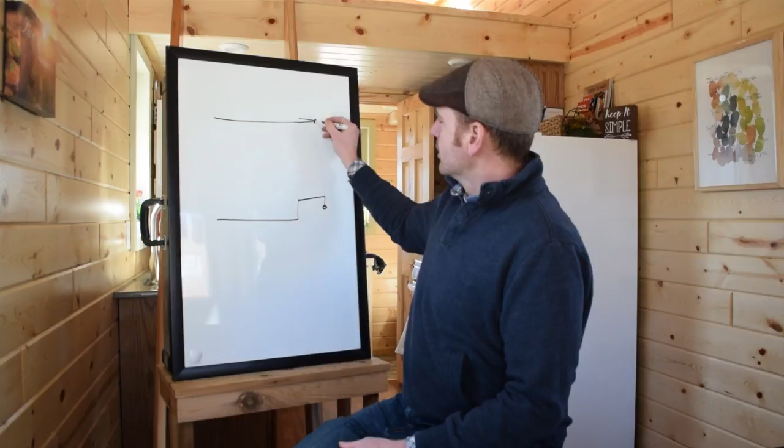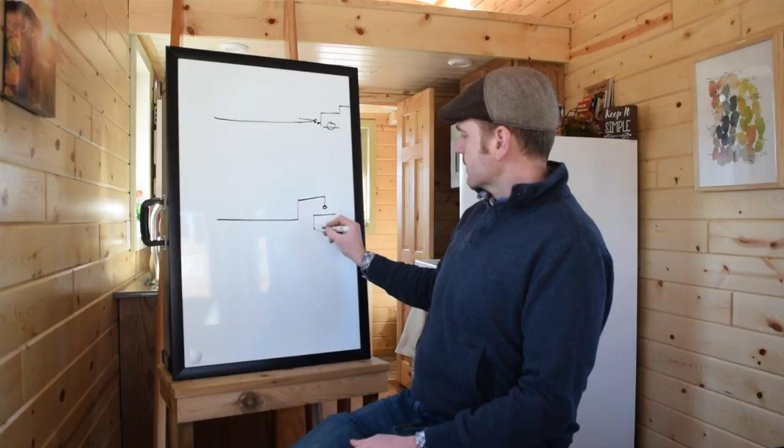This is a bumper pull. This would hook to the bumper of the truck or vehicle, let's say like this, so way out here. And then your fifth wheel style or gooseneck would go above that wheel, so then your truck would be like this, something like that, right? So then that would attach.

And this can haul more weight because the weight distribution is above that axle, or maybe sometimes it's in front of it, but it's usually distributed right over that axle, where this is way on the back of the truck, so that it gets really heavy on the back of that truck, way beyond the axles, way back here.

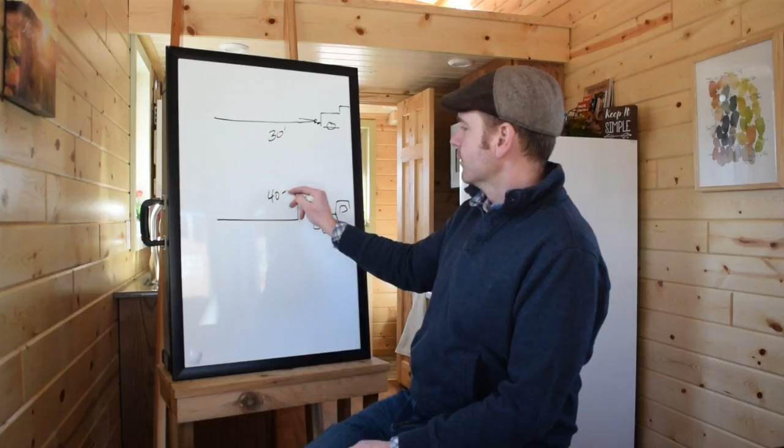So we usually go up to about 30 feet with a bumper pull style, and this you can go 40, 44 feet, something like that with a fifth wheel, maybe longer depending on some circumstances. And then within these styles you have a car hauler style, or like a deck over. So like a low boy, this is where you get your fenders in here, so your wheels would split and they would go up on top there.

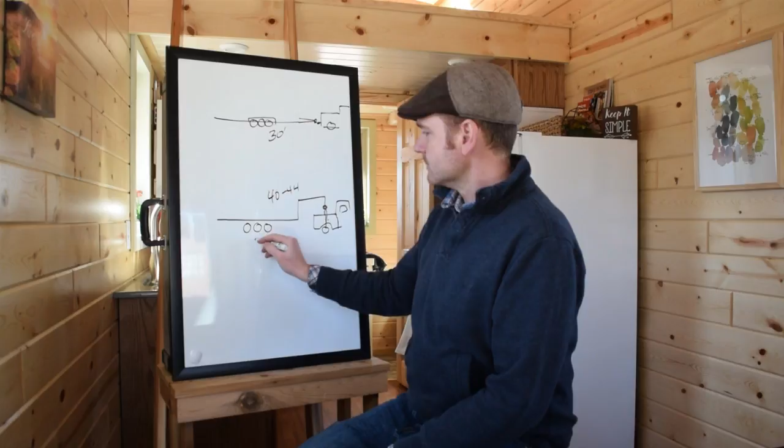Or a deck over. A lot of goosenecks or fifth wheel styles are deck overs where the tires are actually all the way under. So there's not really any wheel wells to deal with on the inside, and people actually like that style a little bit more because they don't have these fenders. Because when you build this up on these fenders, you got your house here. Let's say it's like this, something like that, real quick.

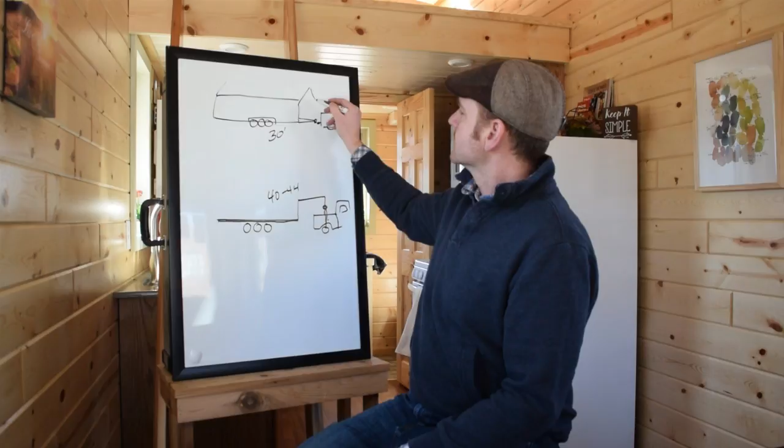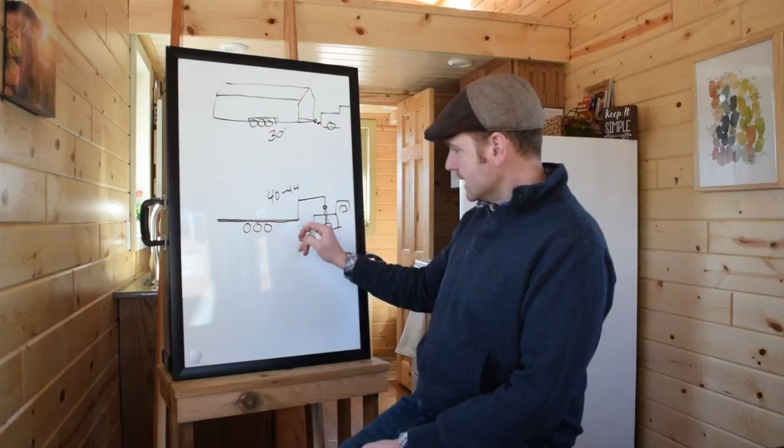This fender ends up to be on the interior wall space. You have to frame around that, and it's kind of a nuisance. A lot of times people will hide it underneath the couch or the staircase, or they'll build something in over the top of it, so you don't really notice it very much. Deck overs are great because you have a flat surface on the entire thing, so that whole surface is all flat and you can build right on it.

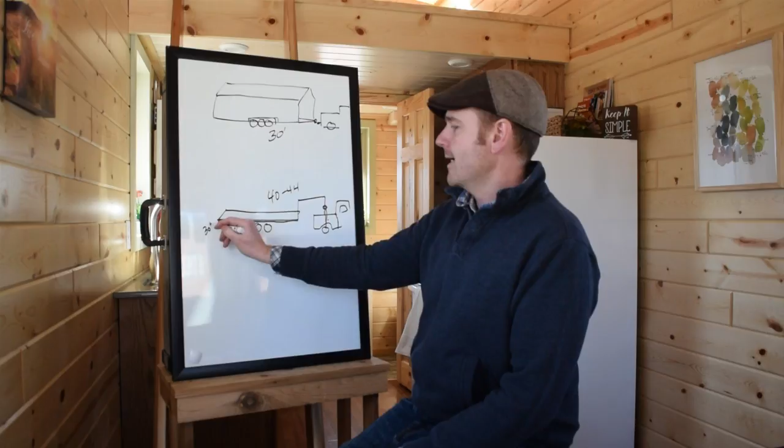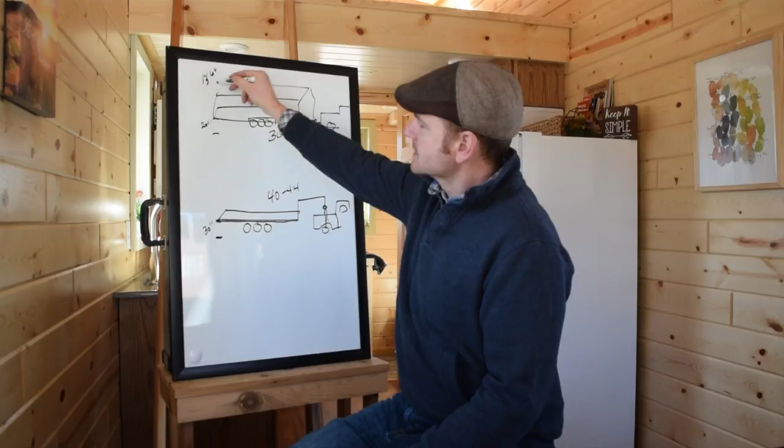But you lose some head height because this whole deck is going to be, let's say, 30 inches off the ground, where the top of this deck here is going to be more like 20 or 21 inches off the ground, because that deck is lower. And when you lower this deck, you get more head height. Because remember, we only have about 13 foot 6 inches at this tallest point from the ground. So if we can lower the deck height, we can bring more building into that space, basically.

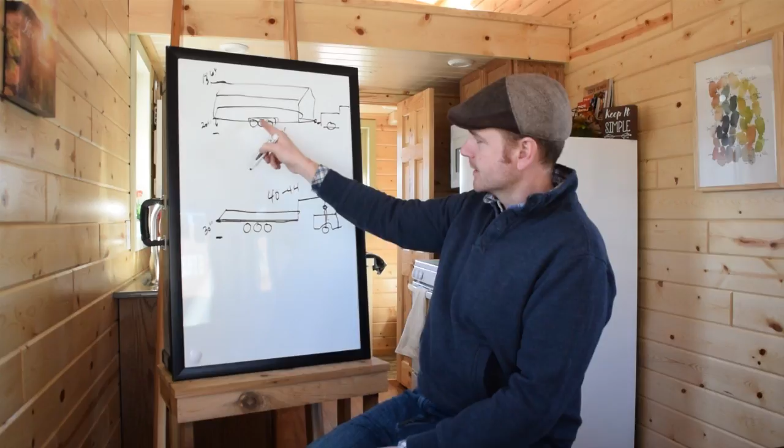So a lot of people go like this, and then there's drop axles. There's standard axles that go straight through, and then there's drop axles. That's an option, so then that deck gets even lower, which gives you a little bit more fender on the inside, but your deck is lower, which gives you more height on the inside.

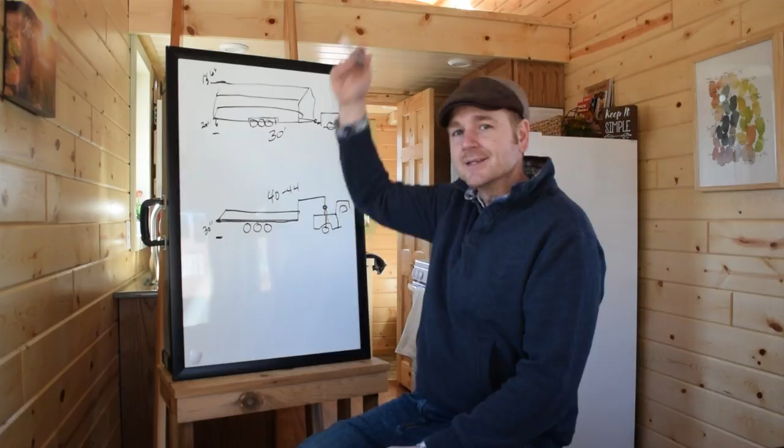And this works really well with a fifth wheel style, deck over fifth wheel, because then people will put their bedrooms up in this area with maybe about 3 or 4 steps, something like that. Or maybe they'll put the bathroom up there. But that works really well too, to put the bedroom up here.

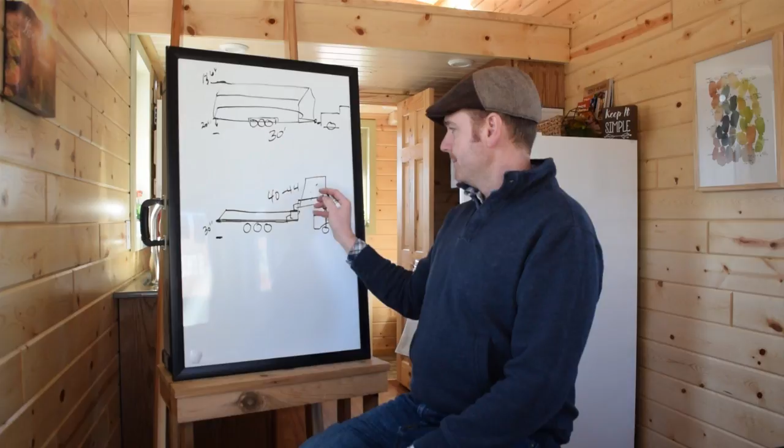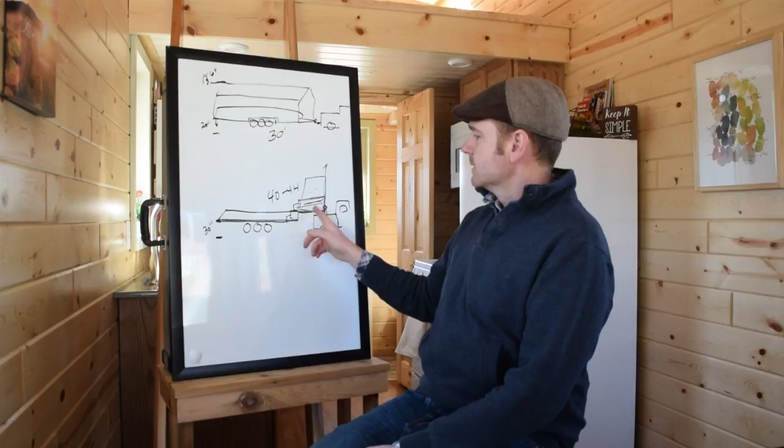But you end up with this height still only being 13 foot 6. So depending on how high this is on the truck, the bottom of this deck here is what you can get here. So that could be only 5 or 6 feet. It's still going to be lower than standing height sometimes, based on the design. But you can use that, and you'd still be fairly comfortable walking around up inside there.

So that's kind of a quick overview of trailers. There's a bumper pull style.

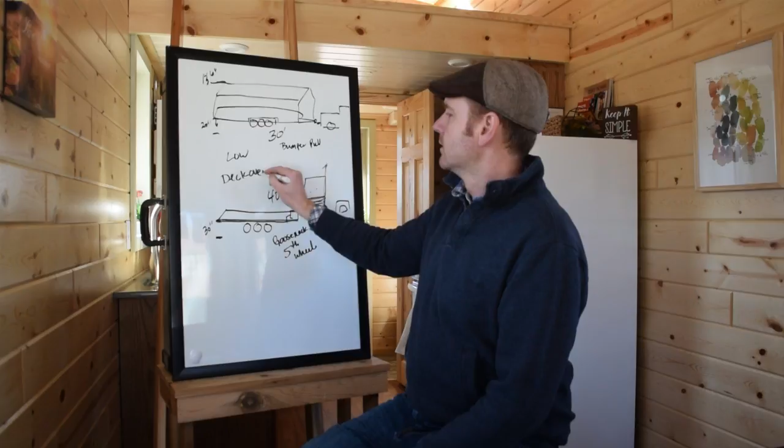There's a gooseneck or fifth wheel style, and then there's, you know, standard car hauler or low boy, deck over, which would be more like this. Deck goes over the tires, and that's basically your scenarios.

Some of them, there's also a different style of axle, like a fish house axle. So these actually can lift up, so they would lift up, and then the trailer itself would fall all the way to the ground, which is great for getting in. It doesn't necessarily add a lot to the height because when you're traveling, you still lift this up, and it still needs to be below that 13'6", but you'd get it as far as, you know, a step out here.

And this is good for older people or retirees or people who are maybe in a wheelchair, they need some wheelchair access or just a little bit easier time to get in. These fish house axles flip up, drop that down, and you can just put a little ramp out there, maybe 6 or 8 inches to get up into the building, which is really great. And then you have a wheelchair accessible door, or however that's going to work for an ADA situation. Well, that's trailers in a nutshell.

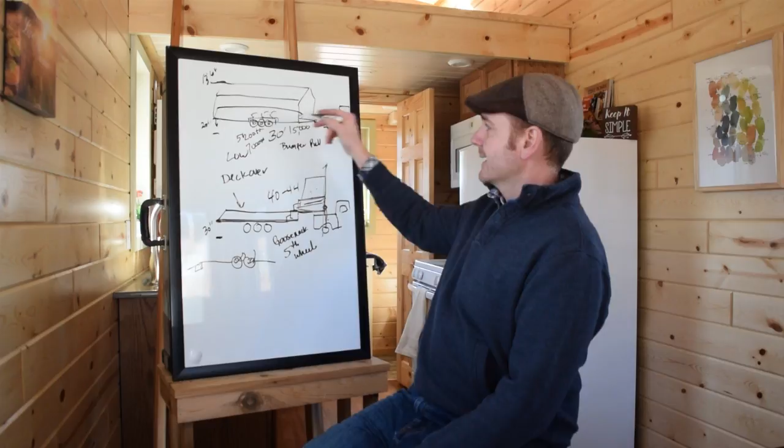The axles can be different axles. A lot of times there's a 5,200 pound axle or a 7,000 pound axle. And then you can add those up. So if you have 5, 5, and 5, you have a 15,000 pound gross vehicle weight rating, basically. You do have to factor in the weight of the trailer in that. As this trailer gets longer, you can upgrade this to 7K axles all the way across. So then that's 21,000 pounds minus the weight of the trailer itself. Usually it's going to be about 20,000 pounds. The trailer's going to weigh something for sure.

But most tiny houses are about 500 pounds per linear foot. So if you have a 20-foot tiny house, it's probably going to weigh 10,000 pounds. This is a general number, not a specific number. It does depend on how many appliances you have in there, your battery bank, because batteries are fairly heavy, if you do a laminate floor or a hardwood floor, how thick your wall material is. There's a lot of stuff that goes into that weight of 500 pounds per foot, but that's give or take.

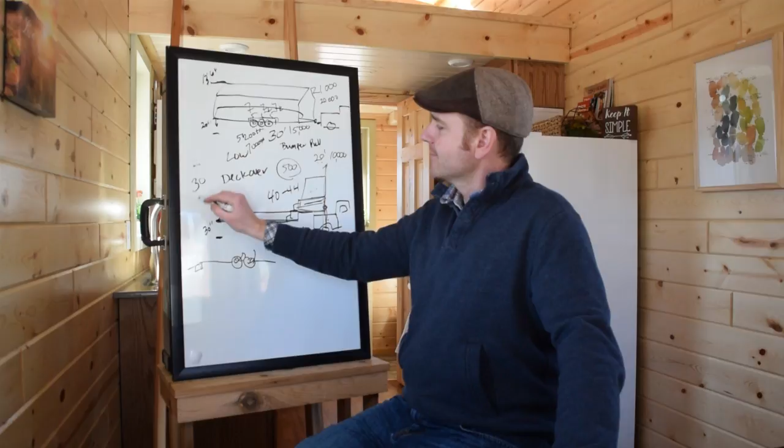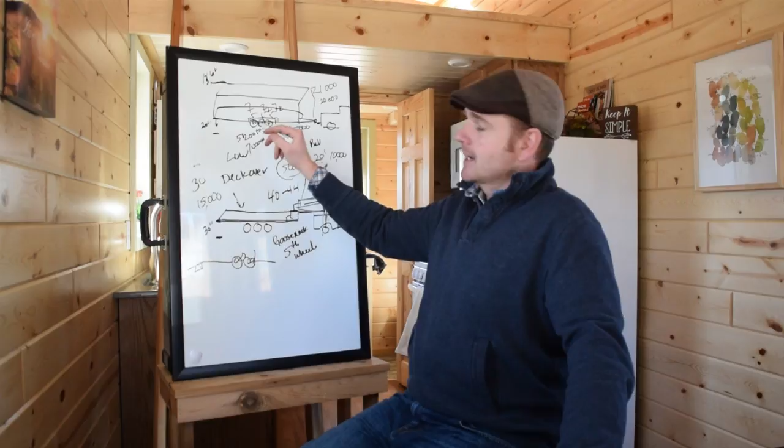So let's say you're going to do a 30-foot trailer at 500 pounds, that's 15,000 pounds, right? So would I want to go with three 5,000 pound axles? I would not, because I might max those out and that would be scary. I would always do the 7,000 pound axles, get up to about 20 or 21,000 pounds. Then I have an extra 5,000 pounds to not worry about getting pulled over or the axles not being able to support the weight. I always overbuild the trailer to what I think it's going to be, because it's the best plan.

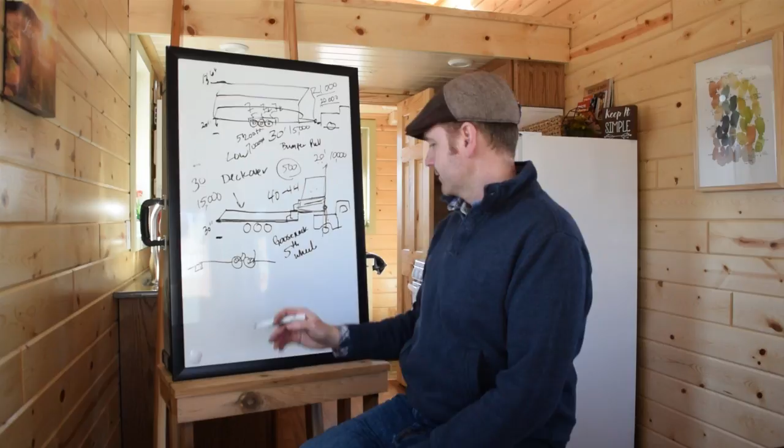You're going to fill these up with a lot of wood, a lot of heavy things in there, maybe a water container, all that stuff. Water is about 8 pounds a gallon. So if you have a 100-gallon water tank at 8 pounds a gallon, that's 800 pounds of water in there, just water alone. So as you fill these up, they get pretty heavy, and you definitely want to go with the heavy-duty axle, pretty much in every single case. I like to overbuild the axle, to make sure that the house is safe and secure and can be traveled down the road.

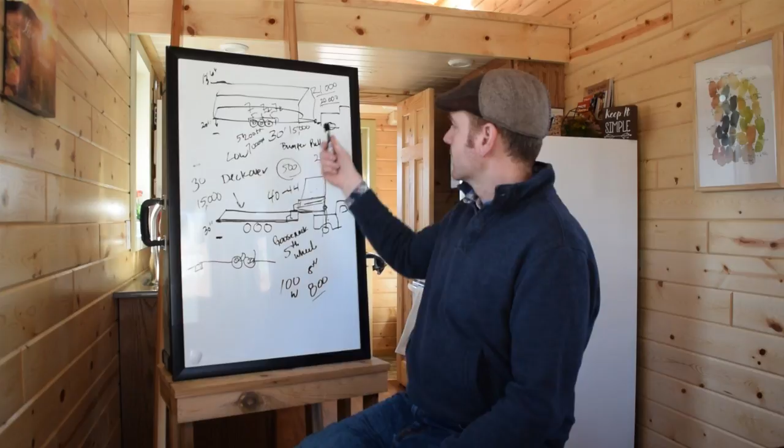Another thing too is the vehicle that can haul this. So let's say your house is going to be 15,000 pounds. Not every vehicle can haul 15,000 pounds. So you'll have to understand the gross vehicle towing rating of your vehicle too. A 1-ton truck or a dually can't always haul that legally. So check into what the vehicle can haul, along with how heavy the trailer is, because those two combined equal a total weight, and that's based on how that vehicle can haul it.

I think in this rambling, that's all about trailers.